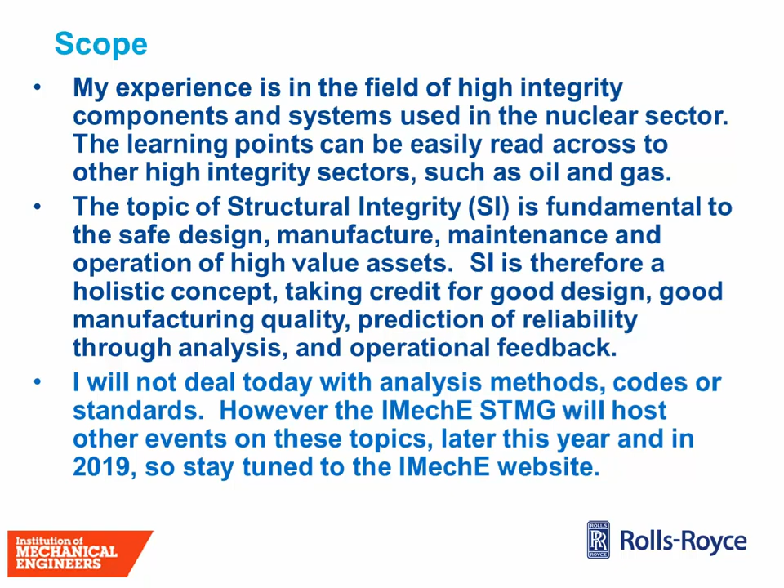I have tried to structure this webinar around 5 topics. So the first is material processing, and I guess we all know that the material is at the heart of what we do. If the material is sound and meets the specifications that we have selected for the application, then that's a really good starting point. However, material processing is quite a difficult topic, and I've picked on heat treatment for this example because there's a lot that can go wrong, but there's a lot that we can do to reduce risk.

So the example I've picked is forged bar. We use it for lots of applications, including threaded fasteners. And threaded fasteners are interesting because they usually see high loadings and high stress concentrations. So we want to make sure that we've got threaded fasteners that are going to withstand those loadings, but are also going to be corrosion resistant and have good properties through life. And so in selecting a material, we might specify a heat treatment to deliver a very discrete microstructure within a very tightly controlled range. We'll be very clear on the composition, and we'll expect mechanical properties that we can rely on to feed into our analysis.

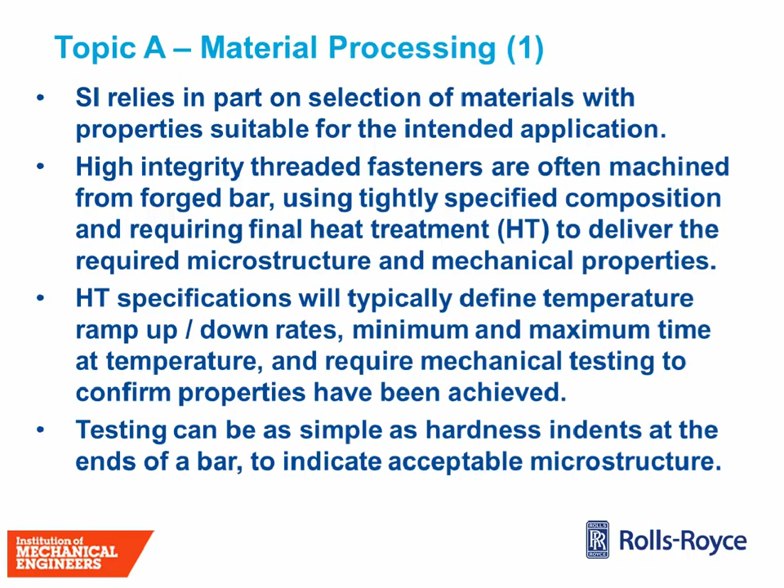So we might go off and do quite detailed mechanical testing for a large forging, but for something like bar stock, where we're producing large quantities, typically we'll do quick and easy tests, such as hardness indents at the ends of a bar. And a hardness indent can be a good indication that the microstructure is acceptable. So here's an example of something that can go wrong.

If you've got a temperature profile, and I've just shown it very simply as temperature against time, that you write down in words in a specification, ramp up at this rate, hold for this period of time, ramp down at this rate, then you've got a requirement that's very simple and very clear, and if you apply it to a single bar, probably relatively easy to achieve.

But if you go to a commercial supplier and ask them to heat treat large quantities of bar stock, they will understandably place as many bars as practicable in the furnace. So in this example, where the bars are tightly packed together, the outer bars will see the temperature profile shown, the ends of the bars will see that profile, but the inner bars and the central sections of the inner bars are shielded by the material around them, take longer to ramp up. They either might not reach the peak temperature required, or they might not stay at temperature for the required amount of time.

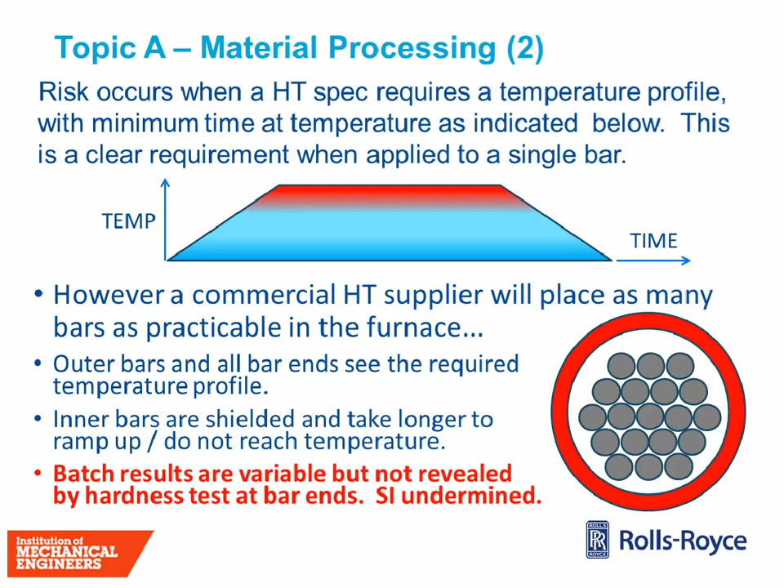And if your quality test is to hardness test the ends of the bars, that failure to get all of the material up to the same temperature will not be revealed, because the ends of the bars will meet specification. So if you don't understand that and don't do something to manage it, structural integrity could be undermined. You could have significant variation in microstructure, significant variation in properties, and not achieve what the design has intended.

So I think my key learning from having seen this sort of issue is that you can't rely on the specification alone to guarantee that the product will conform. It's really important that the designer and the materials engineers who will work closely with the designer spend a lot of effort to understand process limitations and understand how a supplier will try to deliver the specification that you've placed upon them. That close integration of the design and the materials engineer and the supplier to understand the process limitations will enable you to design the process to avoid those risks.

So, for example, you could require the supplier to instrument up central bars with thermocouples. You could require that finished bars are cut into sections suitable for the intended final application, and the hardness checks are done not just at the bar ends but also through section at the centre of the bars. So there are lots of things you can do to manage the risk, but it relies on understanding the specifics and good cross-functional working. I thought it was worth sharing a good practice observation as well.

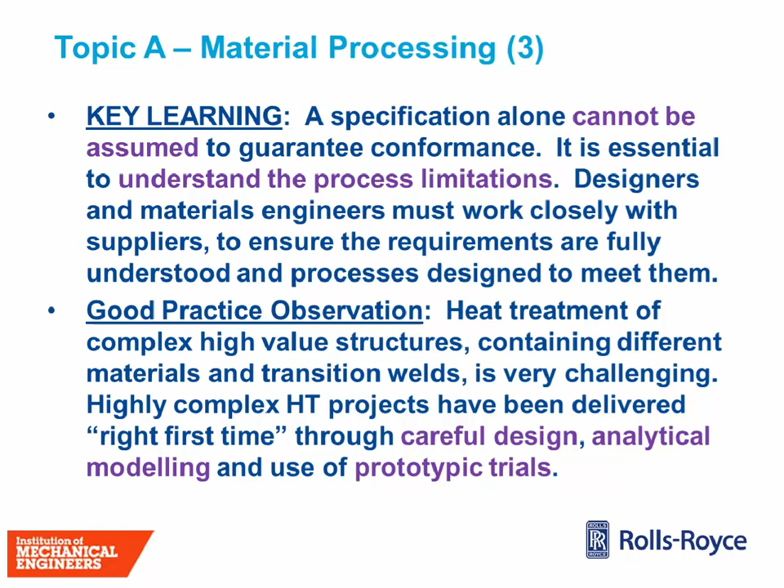And finally, I've seen pretty wide use of prototypic trials, which are expensive and time-consuming, but result in a very high level of confidence that when you press the button on the heat treatment for your complex high-value structure, that heat treatment is going to be successful. So I thought it was worth sharing that good learning, because for big complex items we tend to put a lot of focus in. For less complex items we perhaps relax a little, and what I'm saying is you should follow the same principle for both, but apply the appropriate level of effort.

So that was my first topic. My second topic, and hopefully you'll see that there are some synergies between these, my second topic is inspection.

So we can have great materials, but we need to demonstrate often that those materials are free of structurally significant defects. And by that I mean the sorts of defects that, although they might not be very likely to occur due to the good quality of the manufacturing processes we use, if they were to be present, would be structurally significant. They could result in a failure.

So we often set inspection requirements to demonstrate that unlikely defects are not present, and that's over and above the standard manufacturing quality inspections that we're all used to. So in a forging or a weld, we might look for defects that we don't expect to be present, but that the safety case requires us to demonstrate are not there.

Now, volumetric inspection techniques all have their limitations. So if you think about a weld, a radiographic inspection might be very good at finding a lack of fusion defect that is in the plane of the radiographic shot. Or it might be good at finding a volumetric defect such as porosity. But it might not be capable of detecting a stop-start defect in a plane that doesn't lend itself to radiography. So you might want to use ultrasonic NDE.

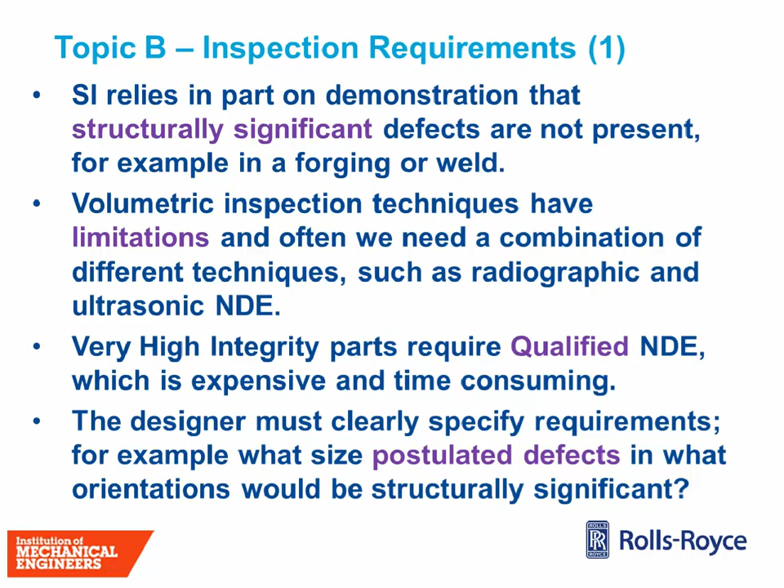Qualifying an inspection is expensive and time consuming, and it relies on a really clear definition of what the designer requires the inspectors to find. So I'm talking now about postulated defects and defects that would be structurally significant, and the designer being very clear about what it is they're looking for.

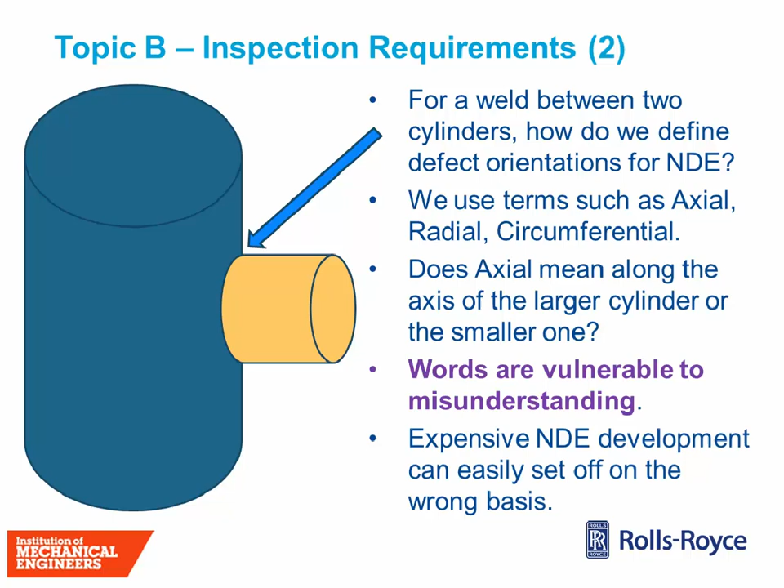And then, by illustrating the sorts of postulated defects that you want the NDE capability to be able to detect on the sketch or on the drawing, and putting some words around them, you can gain much better clarity. So if I said I'm interested in radial circumferential defects, okay, that perhaps helps because we can relate it to the sketch. If I say I'm interested in inter-run lack of fusion defects that are in the radial circumferential plane with a sketch, I've now given more detail, and somebody who understands how the weld beads have been laid down will really have good clarity on what I mean in specifying a defect of that type in that orientation.

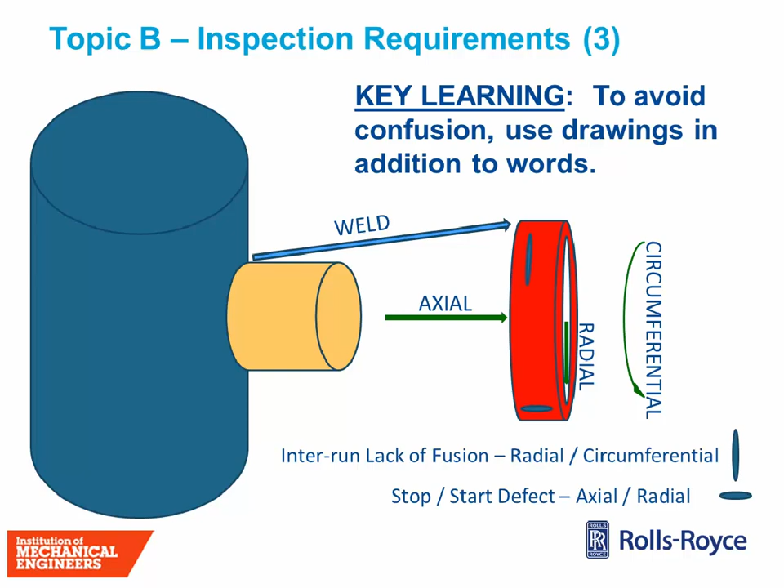Likewise, if I say stop-start defect in the axial radial plane, an NDE engineer will look at that and say, okay, so I understand that the weld bead is laid down circumferentially. When you stop a weld and then start the next run, there's potentially an axial element to that, but it's also radial. I can see that on the drawing. That makes sense to me.

So the important thing really is that NDE is pretty invaluable, but you have to recognise NDE techniques have their limitations. NDE is not a panacea. It doesn't of itself mean that we've got good structural integrity unless you're absolutely confident in the technique. So it supplements good design and good quality control, but you must understand the capability and limitations of the NDE.

And, more importantly, and this is under good practice observations now, designers and NDE engineers must work closely to confirm their understanding of both the capability of the technique and what it's being asked to achieve, and requirements must be communicated without ambiguity.

Going back to the example I gave on the last slide, always use drawings as well as words. If you just rely on words, there's a risk that there will be misinterpretation and you'll spend time and money developing a technique that doesn't answer the requirement that's been set.

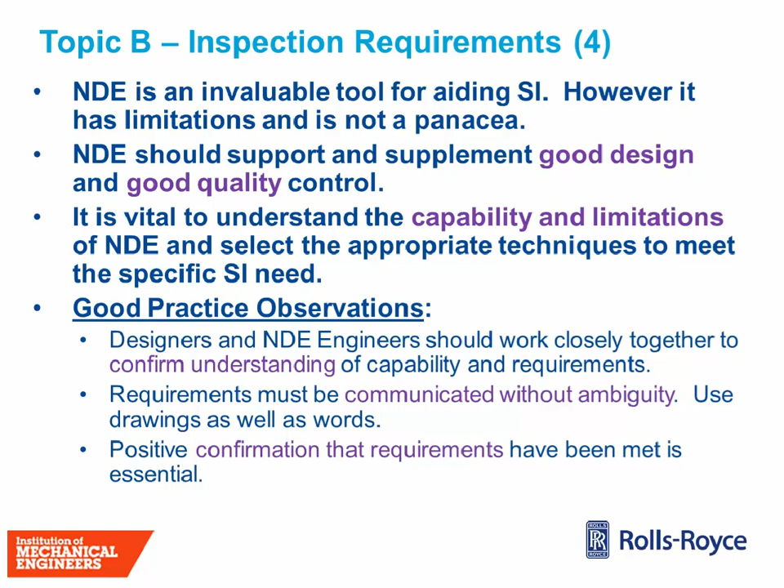And at the end, when that technique is available, there's no substitute to the designer going and spending time with the NDE team, asking them to demonstrate the process, to confirm, by eyeballing what they're doing, that the requirements have been met.

My third topic is a really simple one, and it's summarised on a single slide. And it's a topic that I certainly see time and again, and I'm sure many people do, and it's damage allowance. But I want to put it in the context of where we are today in terms of our design capability.

So we have really advanced design and analysis methods and tools available to us today that mean we can optimise designs. So if you think of a pressure boundary part, perhaps a pressure vessel or some pipe work, we can, through good understanding of the loading conditions, very detailed finite element analysis, optimise the design to minimise that pressure boundary thickness, which will save us money. It'll save weight in the plant if that's important, and it'll save cost in terms of the volume of material that needs to be procured.

However, mechanical damage is something that we see time and again. It can happen in a factory, it can happen on site during build and commissioning, it can happen in service and during maintenance periods. And if you're talking about very long lead, very high value items, then scrapping those items due to mechanical damage is not likely to be tolerable. But operating with mechanical damage in place is also not likely to be tolerable, and you've got to demonstrate that it's safe. So often, if there's a sharp feature that's been caused by damage, then you might dress that out to a smooth profile, but you're reducing the wall thickness.

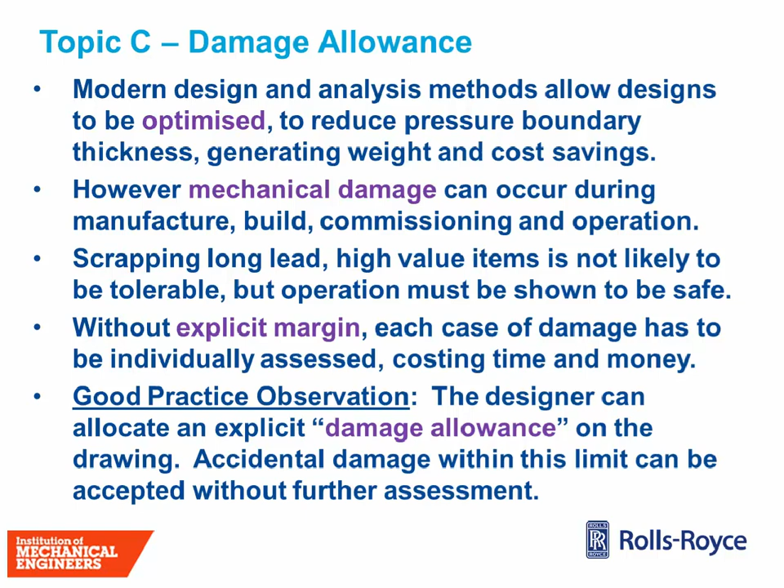So some good practice I've seen in the industry is when undertaking that design optimisation process, add back on an appropriate damage allowance. Now this is a balance, it's a compromise, but if you know that accidental damage can occur, then accounting for it, although it might lead to slightly higher costs in manufacturing because you're putting a little bit back onto the pressure boundary thickness, means that if it's explicitly explained on the drawing, any accidental damage that does occur that's within the limit shown on the drawing can simply be removed and blended to a smooth profile without further assessment. You're still compliant with the design intent. So overall, as an approach, applying an appropriate damage allowance on a drawing can save money and enhance your reputation.

The fourth topic I wanted to cover is analytical conservatism, and to all my analytical and stress analyst colleagues, this really is not a pushback at use of analysis in any way. Analysis is absolutely vital to structural integrity. It's the prediction of reliability through well-tried, trusted and validated methods to give us really good confidence in the reliability margins that we have in our design. And I've said in my opening bullet, that calculated reliability margin should be against the predicted in-service loading and boundary conditions. However, that's where the problem can arise.

So our guidance, for good reason, tends to be conservative. If we are feeding material properties into an analysis, we will tend to pick bounding properties, perhaps based on a statistical analysis of world data for the grade, or perhaps based on doing some discrete testing for the component itself, but we will always tend to a high confidence bound for the material properties that we use in the analysis. So that's conservative, and that's the right thing to do.

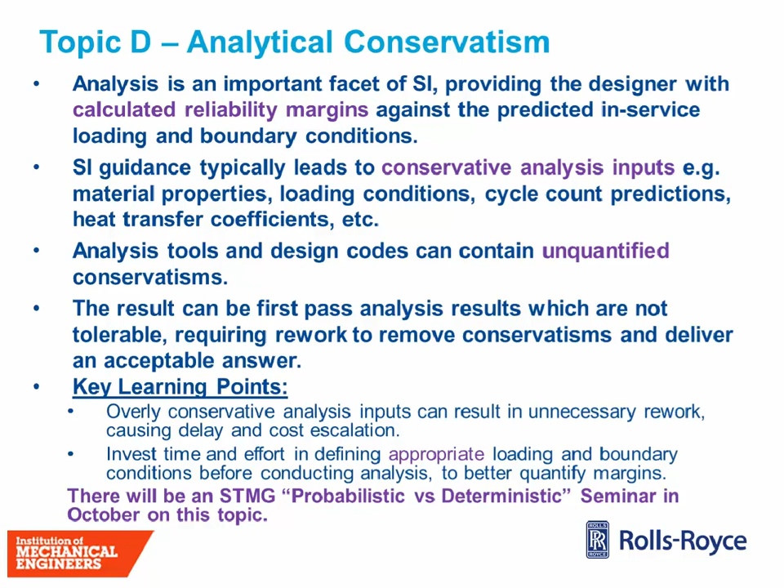My final topic, I did say I would try and just cover 5, is dimensional control. This might not seem as critical to structural integrity at first glance, but it really is important where we're relying on the function of a part to provide protection to an overall system. So good examples would be pressure relief valves, pumps, those sorts of components that have an impact on the structural integrity of the rest of the system, where you've got moving parts and where the reliability of that component to fulfill its function through life does have a reliance on achieving the tolerances that are specified in the design.

Now, I've seen a number of examples over the years of where a tolerance on a drawing is related to the method of manufacture rather than to the functional requirement of the part. And an example of that is a part that was manufactured using a jig grinding process, and the part was very reliable, but over many decades the drawings had been amended and modified to make them easier to use by the manufacturer, and to reflect what the manufacturer needed to achieve at various stages to get a finally compliant part. So the design drawing became a manufacturing drawing that also recorded the design requirements.

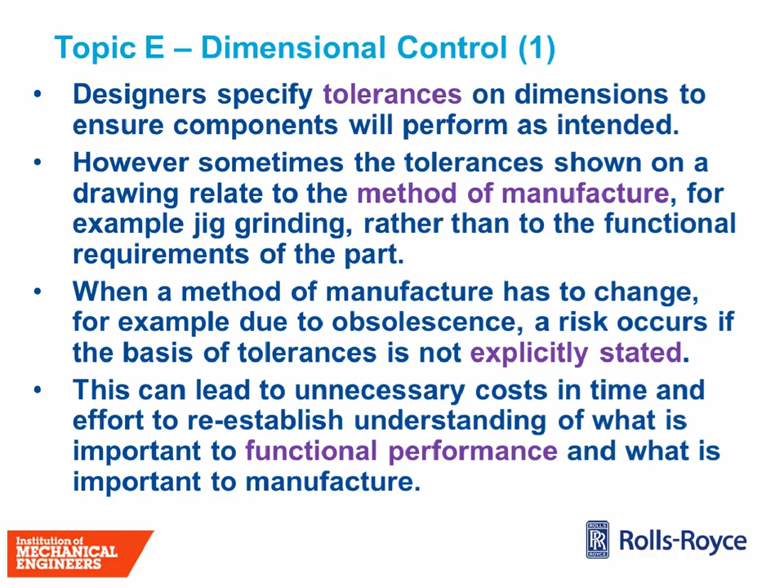And in the example I just mentioned a few minutes ago, we spent a lot of time and effort trying to re-establish our understanding of what was important to the design and what was important to manufacture. And in doing that, we were able to define then a new method of manufacture that delivered a part that looked different to the previous part, but was actually still acceptable.

So I think another way of summarising that is that for a long-standing design that evolves over time, the explicit knowledge of what good looks like can be lost. So you need to explicitly document that somewhere, whether it's on the drawing or whether there's a design basis document that needs to be produced to sit alongside the drawing. It's really important that it's written down in very unambiguous terms.

In the example I gave earlier, the way that we confirmed that we had re-established what good looks like was through undertaking functional testing. So we made new parts to a new method of manufacture. They looked different to the old parts because they had different tolerances, but we were confident that we had re-established what was important to the function. And we were able to use testing to prove that we'd got margin against failure for durations multiples of the planned life of the part. That was a great result for us, but it cost time and money.

And there was one hiccup along the way that I'd like to just spend 1 minute on now, and that was acceptance criteria. If you have very clear acceptance criteria, then great. If you don't, then testing can lead to inconclusive results. So we saw wear on a part of the component. We didn't know whether that wear was normal and acceptable or if it was a problem, although we did know that the part had functioned beyond planned life.

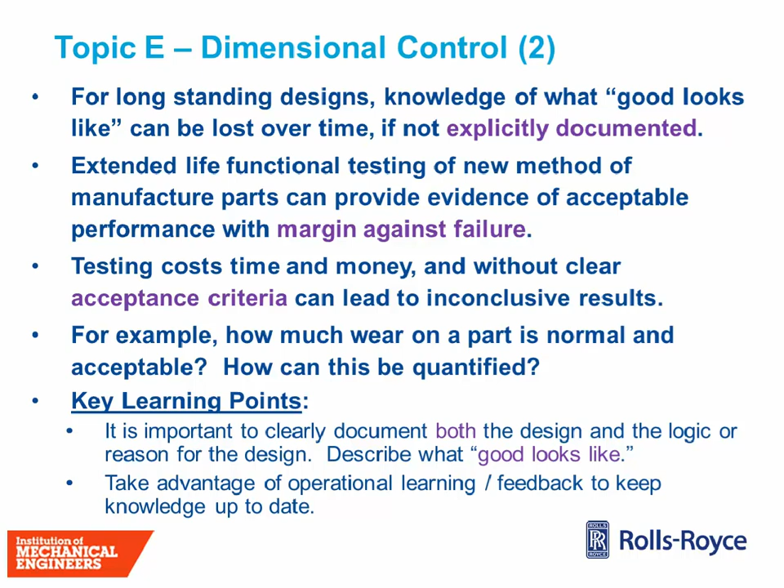Secondly, you can never assume that because you've written a requirement, that is what will be delivered. The capability of different special processes, welding, inspection, heat treatment, forging. The designer needs to really understand those capabilities, need to understand the limitations and the risks, and take steps to manage those risks. And that leads on to the third point, really.

There is no substitute for going and spending time talking to other disciplines, trying to understand their specialism to a level appropriate to help you understand what they're telling you, and help you work together to manage the risks. And if you do those three things, focus on the clarity of communication, focus on understanding the capability, focus on managing the risks, then you will really go a long way to avoiding those unexpected events that can lead to unintended consequences.